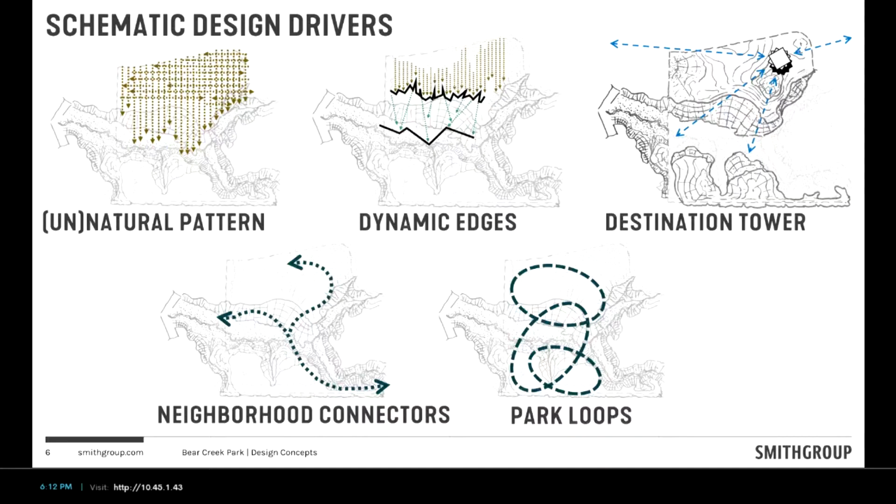One of the things in this phase that was in the master plan is the North Tower. You'll hear from Evo that we've evolved the thinking on the tower. We were actually out there again this afternoon looking across the creek up at the oaks, and we're really happy it's not a 100-foot-tall tower hovering above the park—it's knitting in there nicely.

The reason this principle is called the Destination Tower—actually it was Evo who brought this up—is that we'd both been to one of our models, Peninsula State Park in Door County, Wisconsin, which is visited by 2 to 3 million people a year. With that tower, whether you like it or not, you're going to visit it as a tourist. We didn't want that here—we don't know that Bear Creek Park will have that many visitors, at least not in the first year. We wanted to make sure it wasn't a one-and-done, where you just go to the tower and visit. So the question became what else it could provide—two or three other uses, reasons to come back—making sure it was not just an object, but a destination.

The other thing was connections—loop trails, making sure we build on the good start from some of the existing trails. What do we do to add to those? And knowing we're not going to be building all of the roads and parking, the trail connections from the south, north, east, and west—that neighborhood connection system—was a super important driver.

As we started putting pen to paper and taking the master plan further, we began thinking about patterns that could drive things like trails, structures, and the layout of some of these spaces. Not surprisingly, we looked to nature.

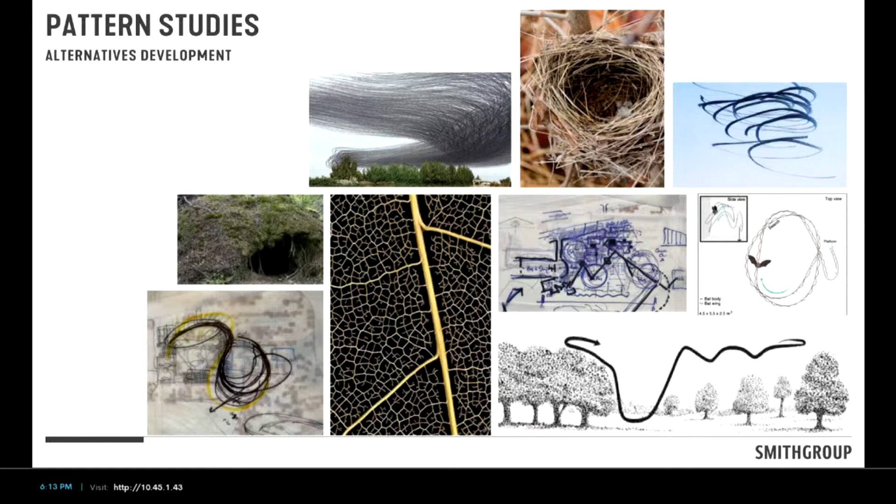We looked at wind and water, and we really started to hone in on a couple of themes - nests, broadly put, whether that's a bird's nest or a wasp nest, but things that were naturally formed, and that dendritic pattern of nests became an interesting driver. The other one was really thinking about migration and migratory patterns.

Some of this was interesting creative tension in our team, since everything is gridded on this park. So what's going to be the driver for something curvy and swervy? Is there something more than just wanting to draw curves out there? This idea of migratory patterns, bats and birds and things like that, where things weren't just viewed from above, but also went up and down, was also important.

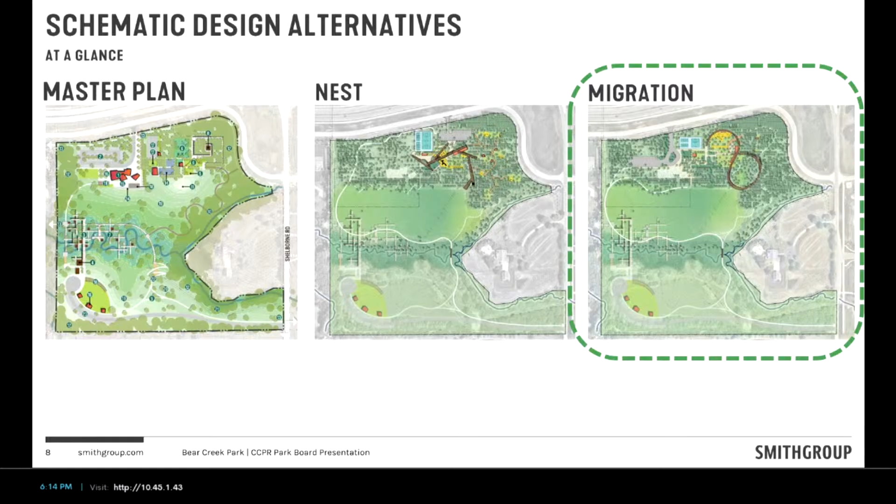So that got us to the midpoint, I think that was the workshop in April, where we actually took the master plan and advanced two different concepts for input from Michael and his team. One was called the Nest and one was called Migration, go figure. They both did the same things, with the basic program of shelters, play, courts and parking. We tried to make sure the program was apples to apples, but talked differently about it, and the tower was probably the thing most emphasized in that pattern, and probably the most different between the two schemes. There were a lot of benefits from both, but we kind of unanimously ended up on migration as the way to go forward.

So this is the master plan we were tracking down in the car here a little bit ago. This is the overall master plan of Bear Creek Park at a schematic point. It should look fairly familiar if you know the master plan, but there's a lot of subtleties here.

The master plan talked about oak rooms. Well, we've been confirming where those oak rooms are, how big are they, where are they. We've been moving the pieces around to find the right fit, where shelters go, next to courts, things like that, and where play should go.

Knowing that this is a really important first playground, but we also know that in 3 to 5 years, 5 to 7 years, with funding, there's going to be a really cool feature, affectionately referred to as chutes and ladders, south of the creek. So this wants to be that first really cool thing, but there's going to be something maybe bigger on the line somewhere too. So we're trying to find the right balance here, not just from a budget standpoint, but also from the experiential standpoint.

Big picture, there's a lot more development and activities up to the north, which was always the intent. It's a little louder up there, sort of the front door off of Voyageur. It will be more passive and quieter to the south, and in this plan, there's a bit of that as well, where we're really south of the creek. Once we restore the creek, it's really going to be about some of those mown trails, and then this multi-use trail that will connect from Shelborne.

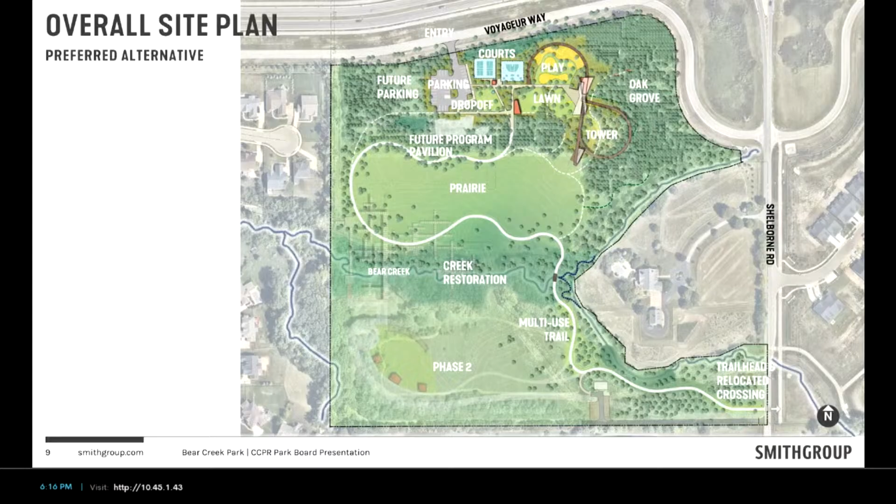Speaking of trails, this is kind of a high-level view of what that circulation system looks like. You see the major trail that connects through, and it'll connect into the other trail system that's being planned and built, depending on where you're at along Shelborne. So that becomes the main entrance from the south. And from the north, we're going to build the first phase of the parking lot, roughly in the same spot as the master plan.

30 cars now, and down the line there might be another 50 or 60 cars once the community program pavilion comes on board. And then the rest is really a series of dash lines, or mown trails, some of which are in place today, maybe a few more to come.

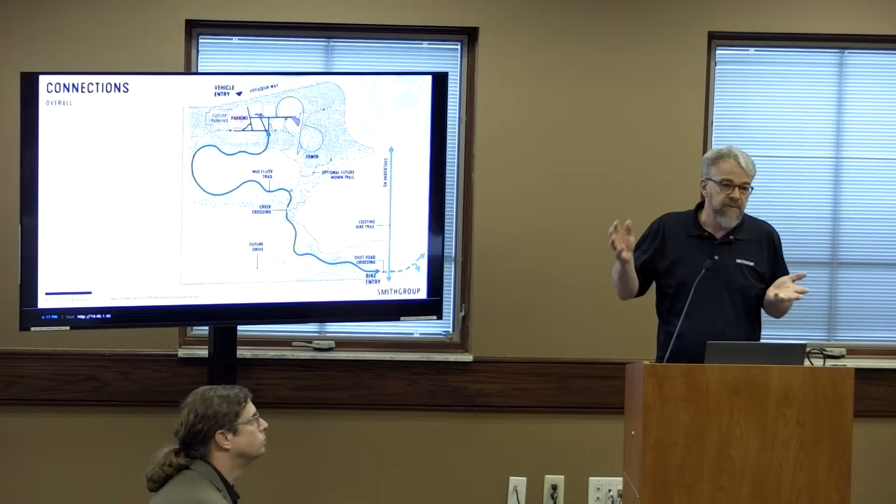I think our thought on those is that over time, if you want to put one through the prairie for a few years, you do that. You want to move it, you move it over here. I think that's a really great tool, and it's been working so great since we started the master plan, so these are, I would say, suggestive right now.

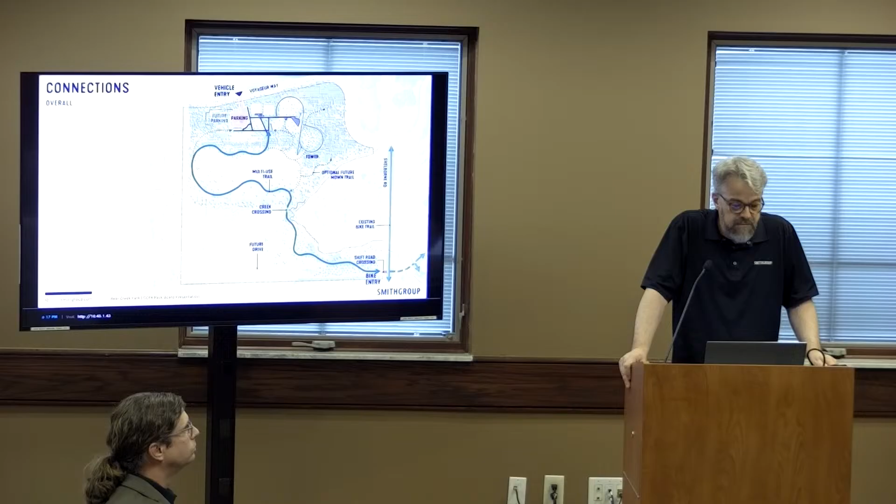And the rest are really sort of local connectors, sidewalks, things like that connect you to the play, the shelters, things like that.

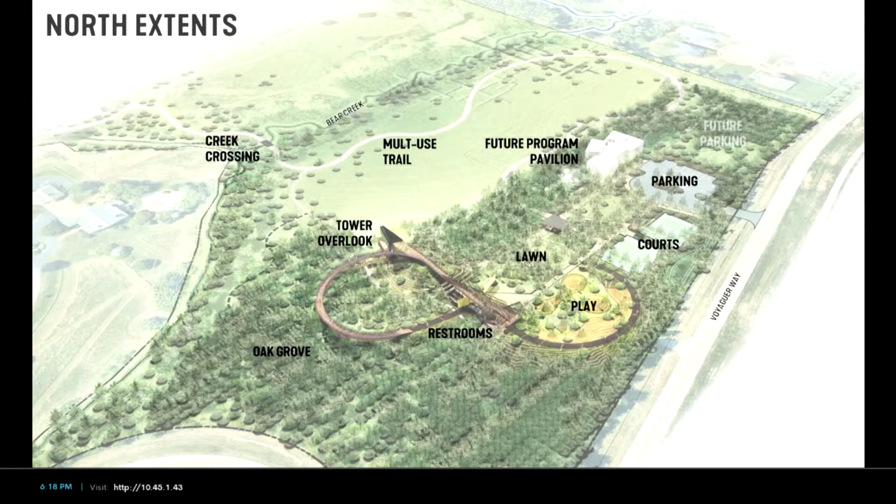But before we get into all of that, I wanted Jay to kind of talk about how this really starts at an ecological level. So, Jay.

Well, thanks for having us back. It's exciting to be back here and to continue to talk about Bear Creek. It's been a really exciting project.

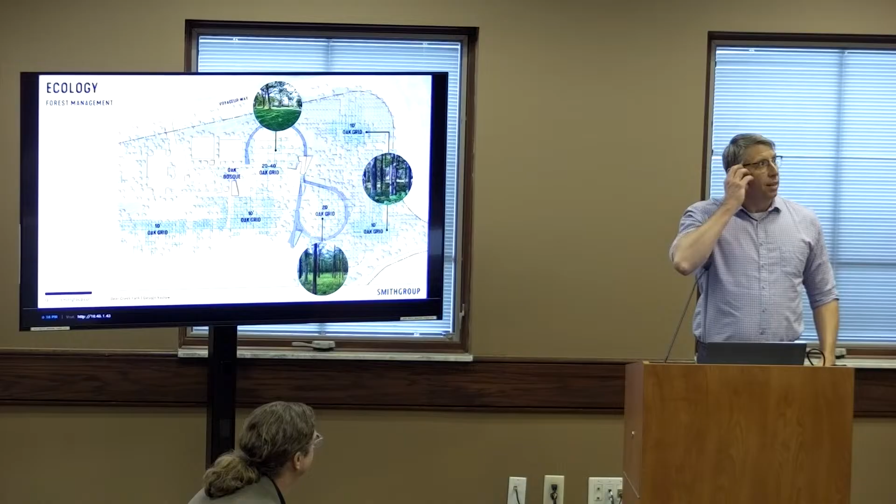So as Greg alluded to, we have this interesting condition at the site where we've got this grid of trees that somebody planted 15, 18, 20 years ago. They're about 10 feet on center, some of them about 8 feet on center. I think they were planted off the back of a tractor.

And the grid of oaks plus the other restored prairie areas and Bear Creek and its natural habitats became a big driver force for the project itself. I mean, it was part of the reason we talked about slowing this project down, was to take advantage of the natural assets on site.

We have the benefit of not having a greenfield. This is a great, wonderful space. And one of the reasons we said, let's slow down, let's put mown trails out there, let's get what we called the barn open, and let the community start to use this space and experience this space.

And if folks recall when we had some of those very early public meetings at the master plan, there were folks in there talking about going out there and seeing owls and different other types of primarily aviary wildlife. And so we wanted to make sure we're preserving that to the greatest extent possible, but maximizing that asset.

So the prairie areas are staying, the restored prairie areas are staying, they might even grow a little bit. And then we've been trying to figure out how to wrestle with this oak grid. We don't want it to go away. We want to be really thoughtful about how we maximize the benefit of that asset.

There's oaks on the grid, but there's also some oaks that have died, and there's some volunteer species that we probably don't really want out there. There's some invasive pear that we don't really want that probably need to come out anyway.

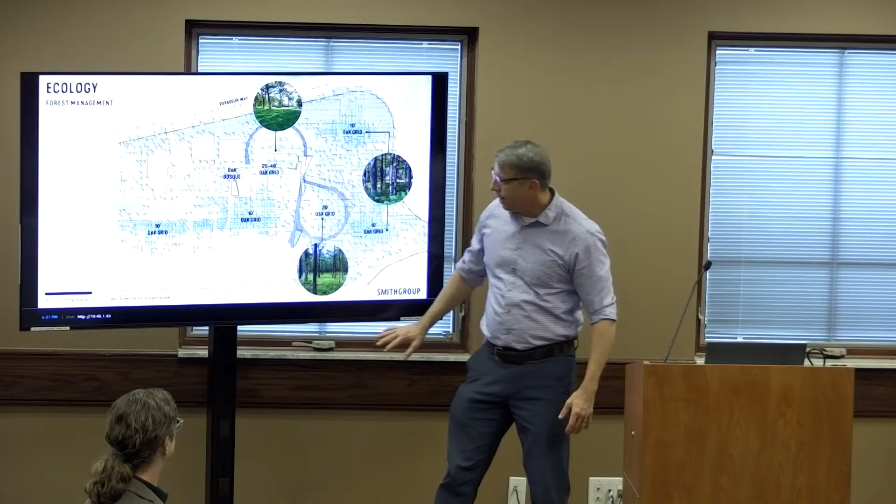There's a lot more walnut and ash, especially along Bear Creek, and as we get south to where the old residence used to be, there's not very many oaks at all. There's some hackberry, so some of it's good native, some of it's not. But we can move some of those oaks from the north end that would be otherwise impacted by our project to the south end. So there's a moving operation to be able to relocate some of those trees on site.

There's a moving operation to relocate some of those trees potentially to other parks. If we know we're gonna have to move the trees anyway for some of the development, we're already starting to think about, is there a need for a good 15 to 20 foot tall, 6-inch diameter oak at West Park? So trying to think now about where some of these trees might go to other facilities where we can benefit the portfolio of parks already.

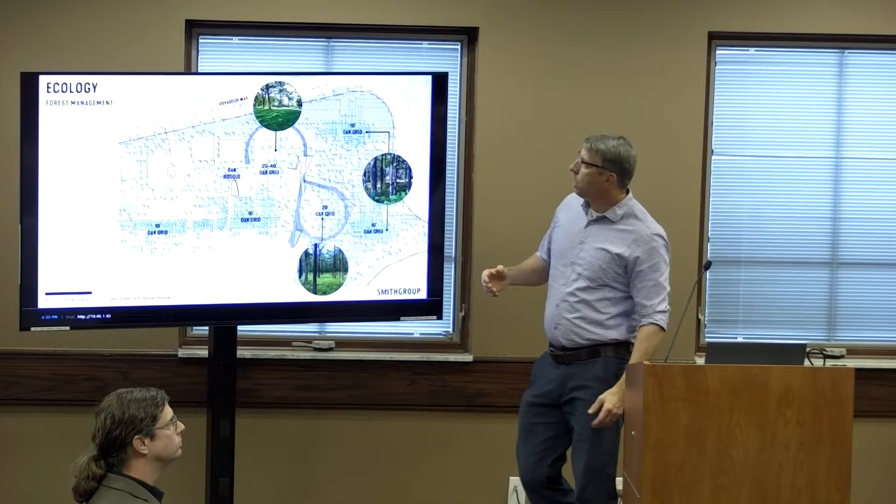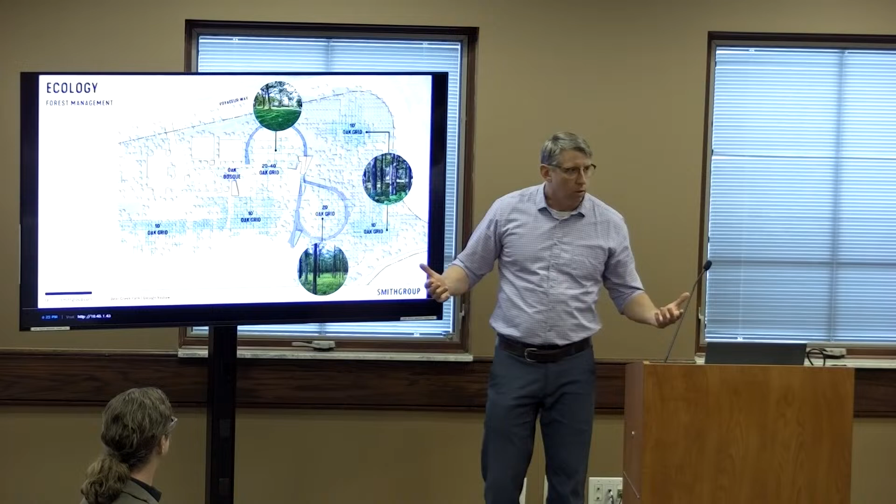After talking with the spader, we realized that some of these trees can actually be moved and temporarily stored on site, and we can move them right back to their old location if done right. If we're working with the right spade operator, they can come in, spade the trees, move them to a temporary location, a nursery facility probably on the south side of the park, and we can keep those trees with the drip irrigation system healthy and alive, and then move them back, as long as we're not talking about 8 years down the line.

If it's in about a 2-year range, we can move them and move them back and be really able to reestablish those trees in a responsible way. And that allows us to maximize the benefit of having 18 to 20 foot trees, and hundreds of 18 to 20 foot trees on this site.

So the next step we did was to take a look at, what do oaks really want to grow at? What's the spacing that oaks really want to grow at? A 10 foot on center spacing is really too tight for oaks. Occasionally you'll see oaks growing that way in nature, but it's pretty unusual that you'll see oaks in a 6 to 8 foot spacing. So over the course of the last couple months, while we've been out and about doing other things, we've been trying to evaluate how oaks are naturally growing.

Generally what we're finding is they prefer about a 45 to 65 foot spacing. So what we've tried to do is look at, in our highest use zones, prioritizing those spaces to move our oaks out, relocate them elsewhere on site, relocate them on this site, on other sites, or move them and then move them back, but trying to achieve closer to somewhere between a 45 and a 65 foot spacing.

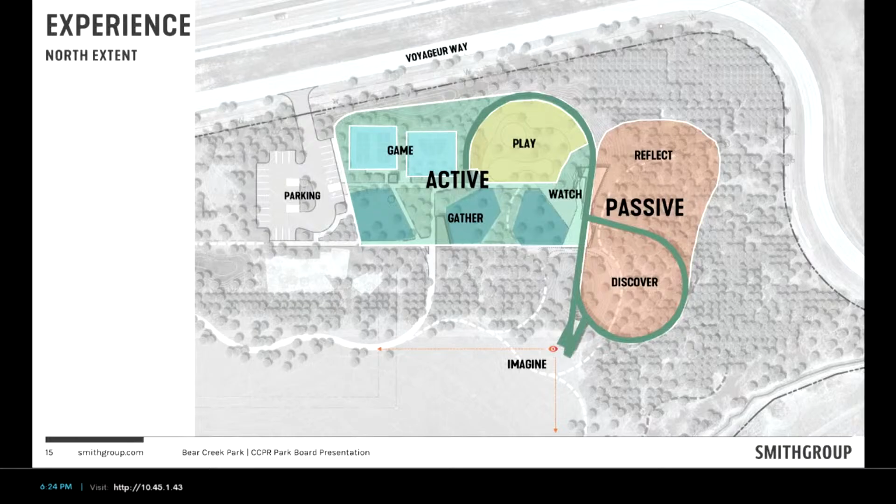The way we dealt with the oaks was to really think about the site, the north site, in two ways. There's a passive arm here and an active arm. So that migration architecture that we developed really allowed us to split the site into two different zones. And you'll see when Evo presents it, the structure itself actually creates a bit of a curtain to allow you to have a very active zone, kids and families picnicking and playing and running around and doing their funnest activities.

And then a moment where you make a bend, and all of a sudden you're back into the densest part of the forest, the quietest part of the forest, maximizing the benefit of keeping those oaks tight. This happens to be where our oaks are going to stay the tightest, and you're back into a passive space, a reflective space, a discovery space, where we're really bringing your focus back into nature.

And as Greg alluded to, it's not just that it's doing this motion at a two-dimensional scale, it's doing this motion and coming up and coming back down. So we're really trying, and Evo's gonna present that in a moment, but we're really trying to maximize the benefit of that structure serving as a mechanism to really marry the two experiences of the site together.

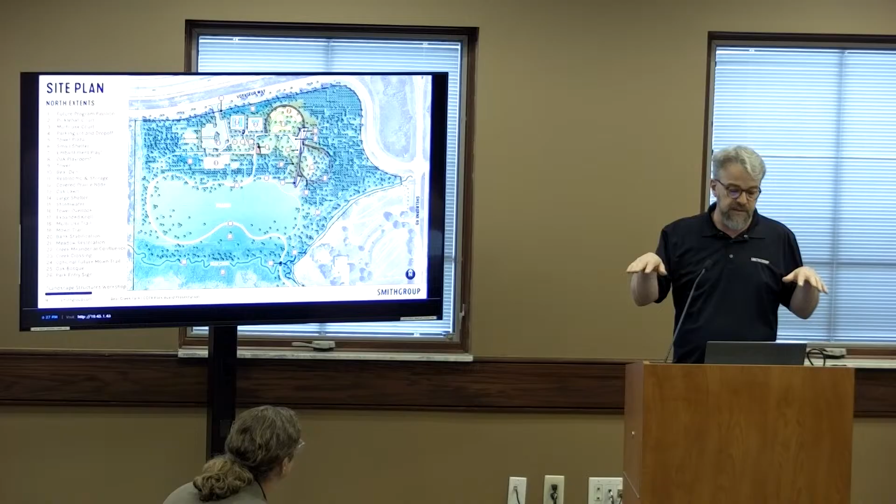We want to make sure you can get there accessibly. So you could just do a ramp system, which is kind of a boring thing, or we can make it into a journey or a migration. That's kind of what the central feature of that really is.

And the way we start to do that is, going back to what Jay talked about with the trees, we're looking for where some of the openings and maybe where the invasives are that we know of, and we're trying to target those as places to do more of the grading, balancing cost and impact, good and bad.

So a lot of this is really on berms. If you think about what we did at West Park at the playground, where you climb up on that berm, it's the same general idea here, a different playground, but the idea of actually climbing on a berm, minimizing how much of this is really just on structure.

But then where we have structures, we're going to use them for multiple things, and the same thing coming down. We also have similar low areas that we're getting ahead of where stormwater is going to go, things like that. So this first phase is starting to really drive that.

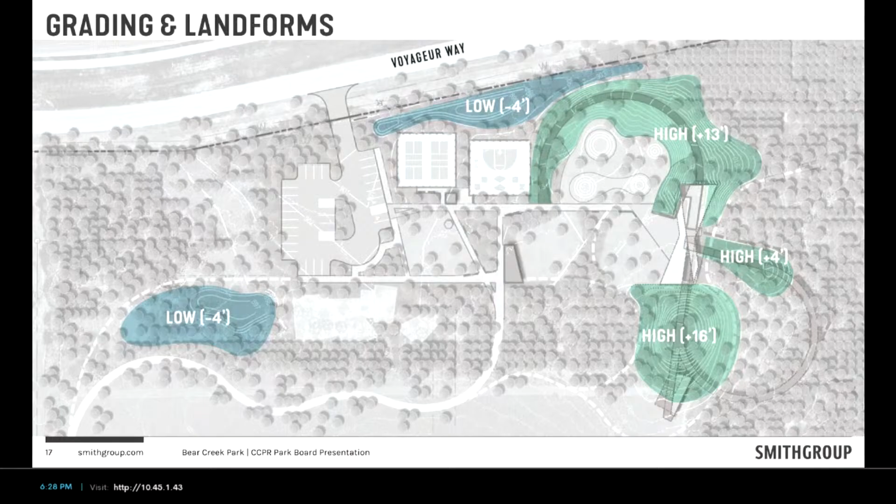We call it berm hopping, where you have this play berm that you climb up, and then for a bit you bridge across it, and we're actually taking a knoll that's already on the site and adding 8 to 10 feet to it. So you kind of hop across to that, which becomes your launch point for what we're calling the tower experience.

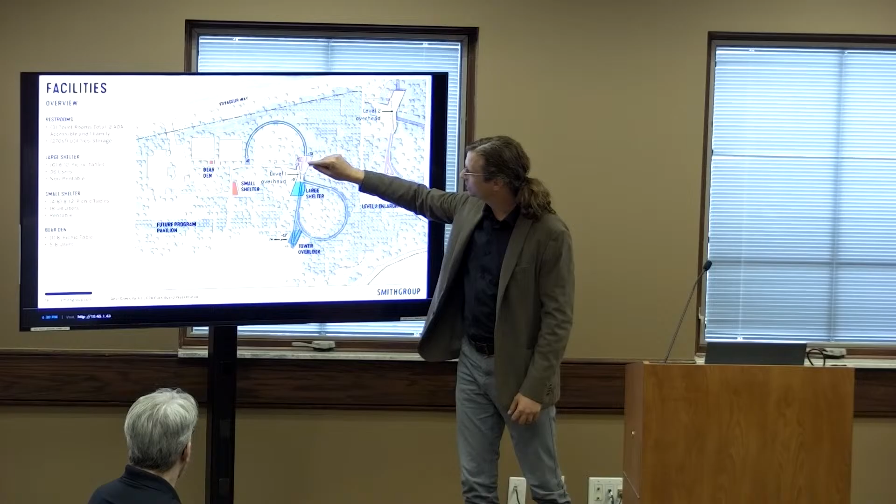Ramp up to what we call the parent perch. These rooms start to move upward into the canopy, 13 feet here, and continue along the spine. It straightens out for a moment, potentially to align your experience as you come to this opening that's naturally there now.

Sorry, can you get close to the microphone? Swing it around. Could we get them a handheld mic? I will maybe work on my point. Thank you. That's fair, good point, I'll grab the right device here.

So the point at the end is 14 feet above grade. This is actually something we studied quite a bit when we first thought about a tower experience. We thought, what's right? Is it 20, 30, 40, 60, 100?

We studied what's the right experience in Bear Creek, and we really came to the realization that once you get too high, you're not experiencing the park. Knowing that as these oaks mature through this ecological wisdom of spreading them out and letting them become the beauty they once will be, right now we're creating today's experience, which is in the canopy, but as the oaks mature, you'll be midway through that canopy. It'll be a really amazing experience to watch this park mature over time.

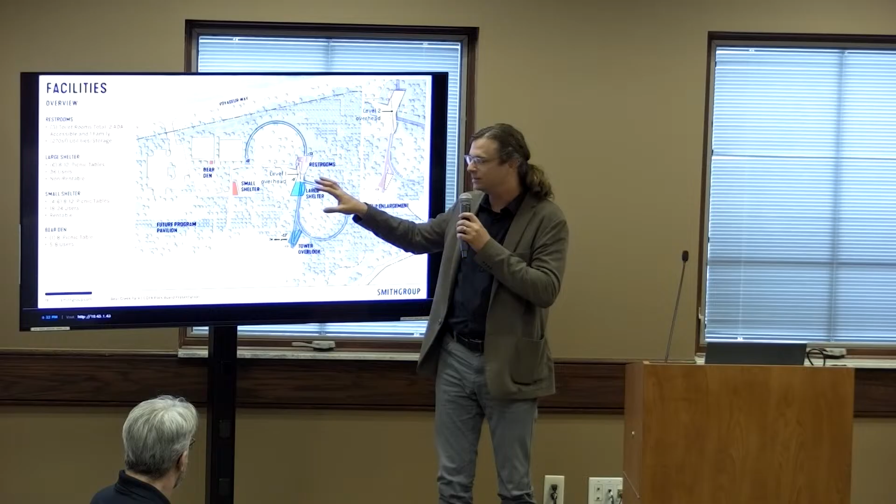You'll come up to this 22-foot overlook, and as we transition you'll see some moments of architectural expression, but really leaning into this idea that everyone probably has their own reference, but when you walk through a gridded experience, think of a cornfield or this sort of farmed tree scenario.

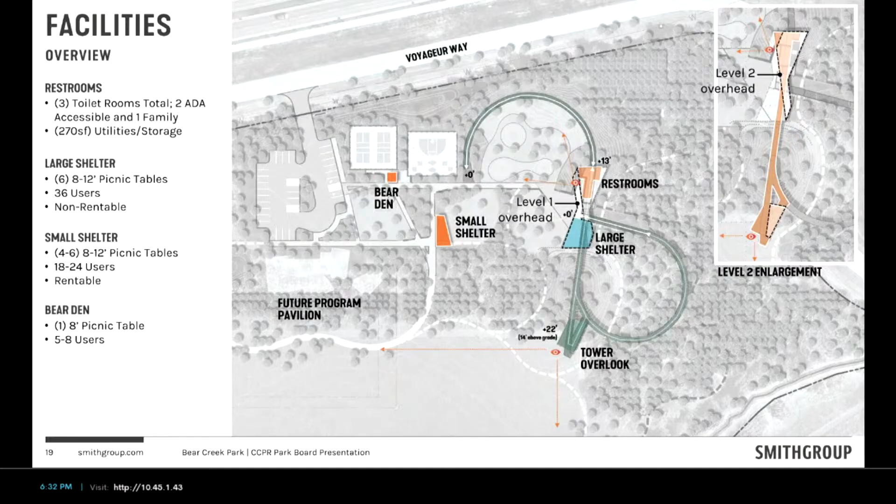Every angle you look at creates these glimpses and curiosities. The curved walk through really leans into that forced experience through seeing these linear trees in different perspectives until you get to this forced perspective, which is really wonderful over the field.

And then back down the ramp to the core. This core is where restrooms are embedded at the base, and then one of your main rentable shelters is sheltered here as well. What am I forgetting here?

I suppose this is the upper section. As you can see, when we get to the architectural expression, these moves are interpreted to help play with that canopy and filtered light, providing shade but also shelter from any rain.

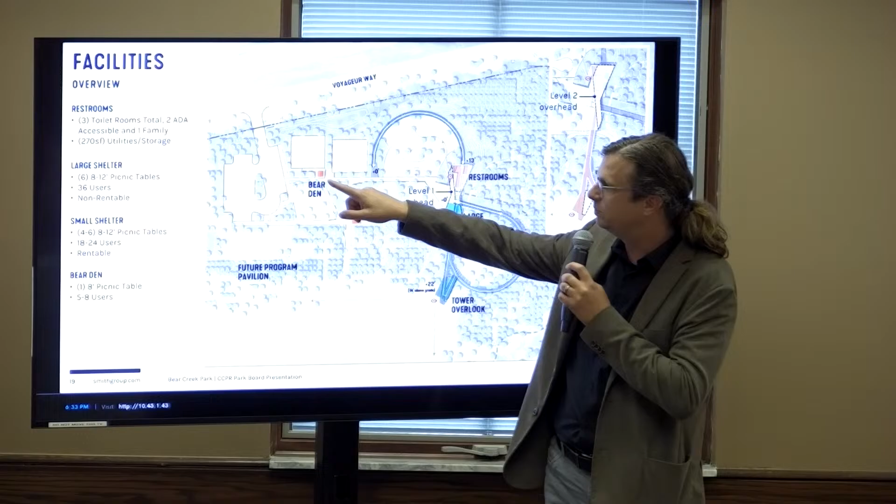So the rest of the program, to be clear: 3 restrooms, 2 of them accessible, at the base. Utility and storage minimally there as well. The shelter that Greg spoke to, which we're calling this bear den, a small single picnic table for 5 to 8 users adjacent to the courts there.

I'll jump to the next slide. So here you get your first view of the floor plan of the core structure. I joke a little bit here - people see different things, but today, after seeing a praying mantis on site, I want to pretend that this is inspired by a praying mantis. I see some similarities.

So anyway, joking aside, the first floor plan: storage room and the 3 restrooms. Then the structure floats above, as you see here, to create a sheltered, larger shelter here.

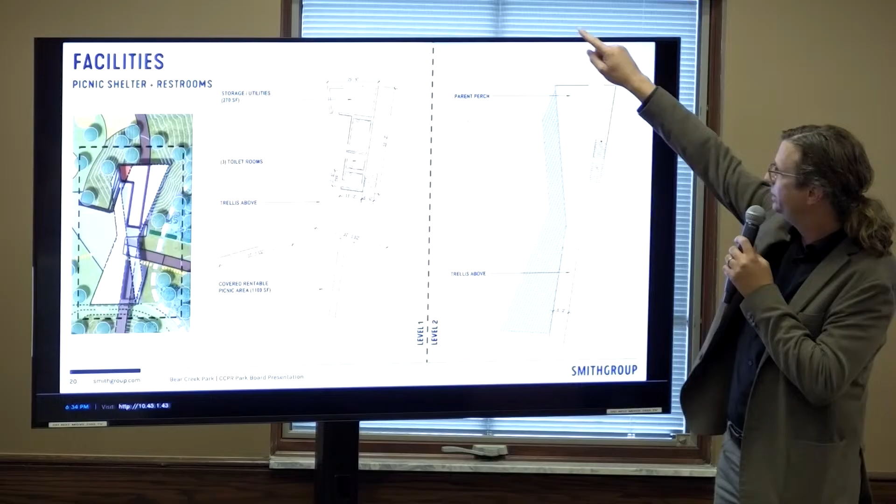And then the upper section, you'll see the upper plan here. The ramp comes up to an upper occupiable area, a moment to overlook your kids playing. If needed, you can short circuit the trail back down to restrooms, really creating this hub at the center of energy and circulation for this part of the site.

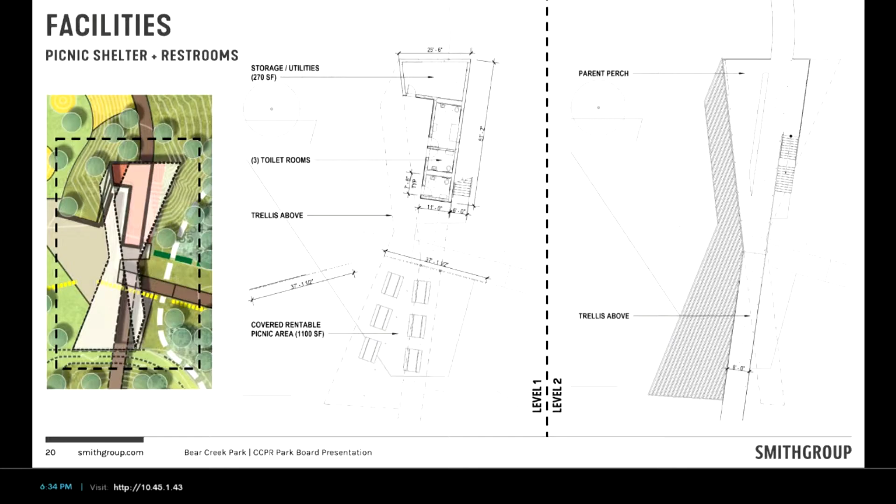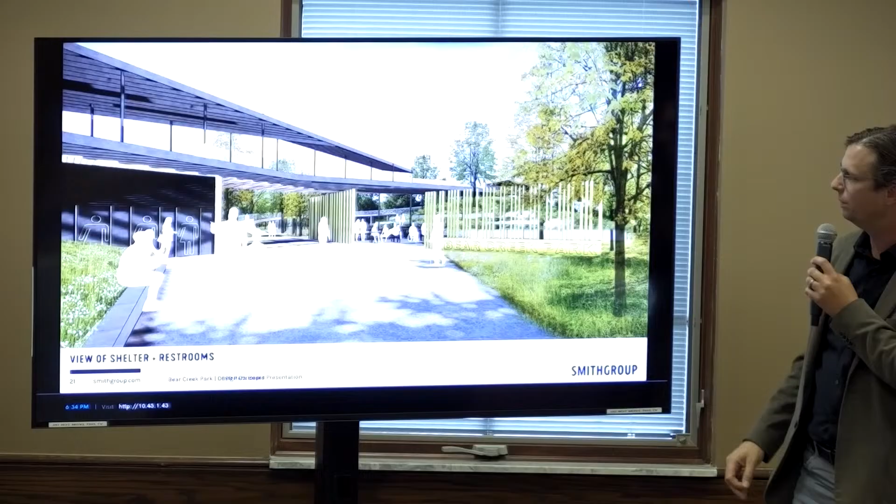Here's your first peek at what that experience is. Arriving from the west towards the structure, you can see some screening, some playing off of this repetition and visual play that you get naturally in the landscape with a graphic element there.

There's your larger shelter, restrooms on the left side of the image, and this is one of your portals up, starting the journey back up, and you can take either direction. And then this is that raised perch moment above.

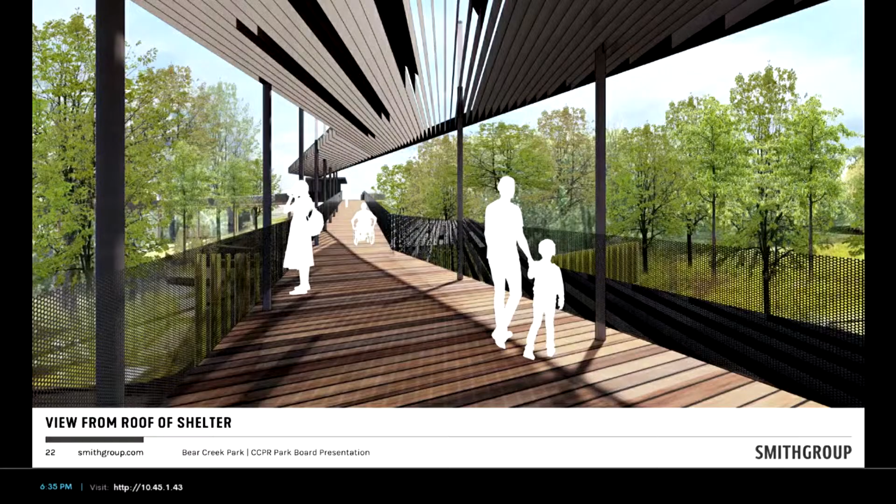So now you're about 13 feet up. This is pretty indicative of the tree canopy today, so you're in the canopy. The play area is to the right of the image, and the more quiet, natural areas to the left side.

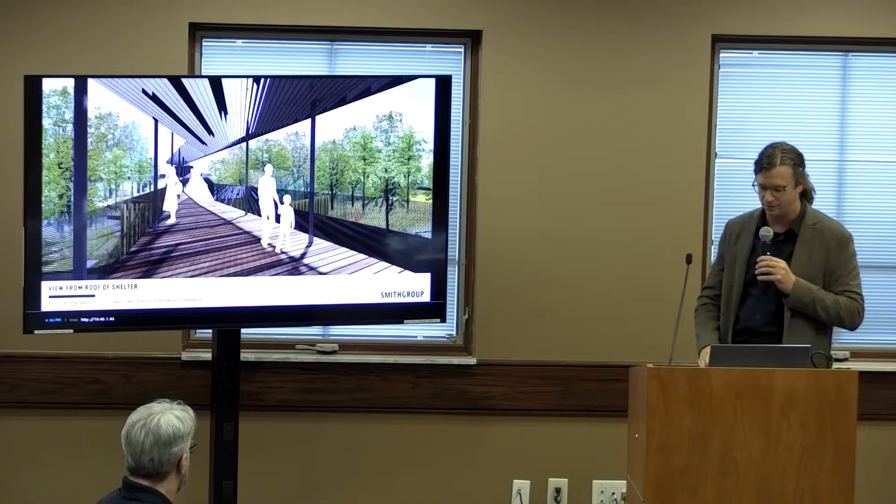You can see prairie is straight ahead, and I think the design of this is intentionally, as I mentioned, curved to sort of contrast with this grid in the landscape, but also has moments of intentional linear elements to really force your perspective and drive you down towards the end.

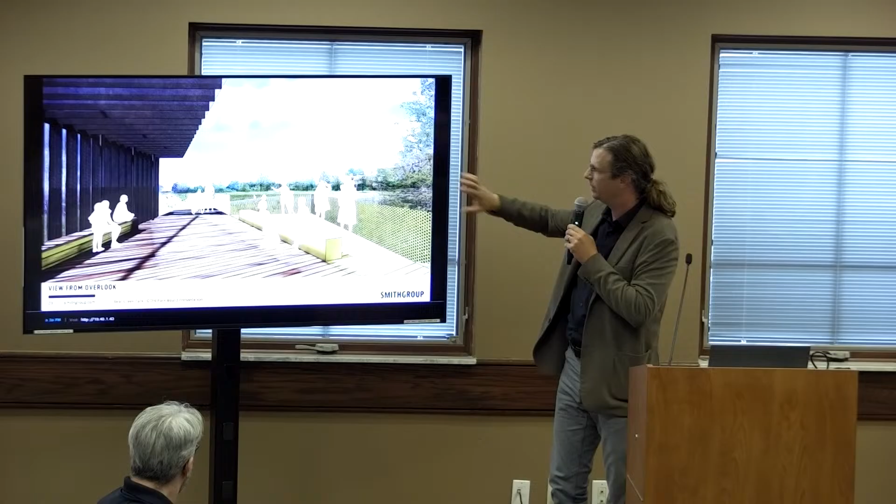And here's your perch moment. So again, using a series of linear vertical moments to frame the left view to force your eye to really enjoy the perspective shot over the prairie and over the creek.

There's the future chutes and ladders for context. This is a space that can host 12 to 25 people, kids or adults. It can really scale and be a moment for teaching or gathering. It's quite flexible, but still feels intimate when more sparsely occupied.

We'll integrate a few bench moments, as you see. I think the other nice thing this does is the residence to the left here - I don't know if we have a name for them yet - are nicely obscured. It would be visible without this screening. So it not only screens that home, but also really focuses the purpose of this space back towards the inside prairie.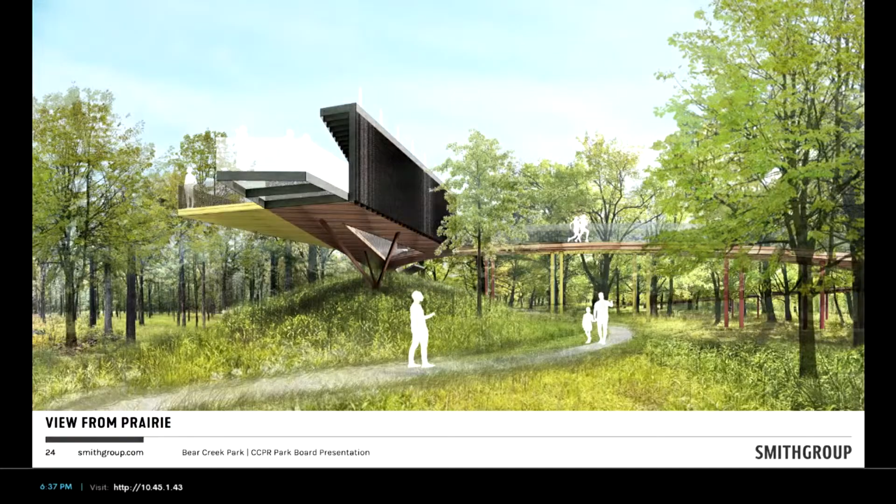And then this is your view of the perch coming from the South Prairie Trail on the east side. You can see that perch. Maybe we have different moments of experiences - some transparency, some netting experiences, little moments to offer some transparency and porosity. And you can see the trail coming back through.

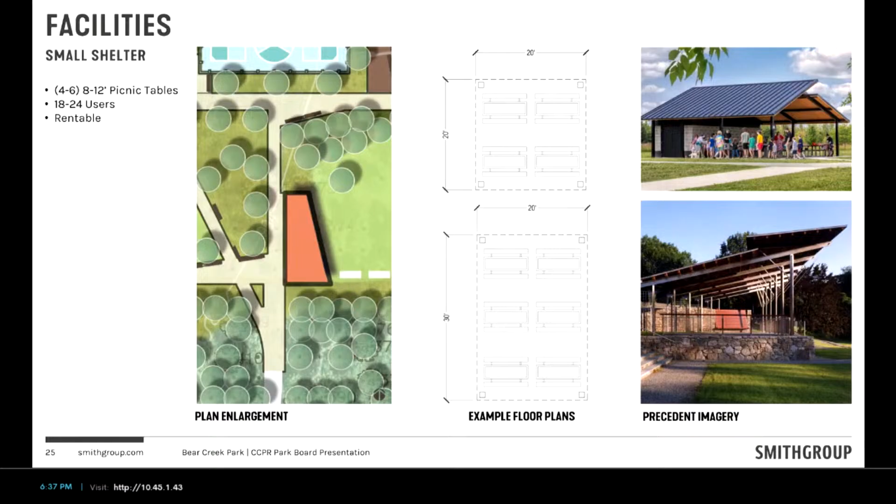All right, and just as exciting are the remaining shelters on the site. So a couple precedents you're familiar with, this one here for sure. I think this is maybe a bit more standard issue, but we think the architecture will be a simple relating expression to host 4 or 6 picnic tables below, 18 to 24 users.

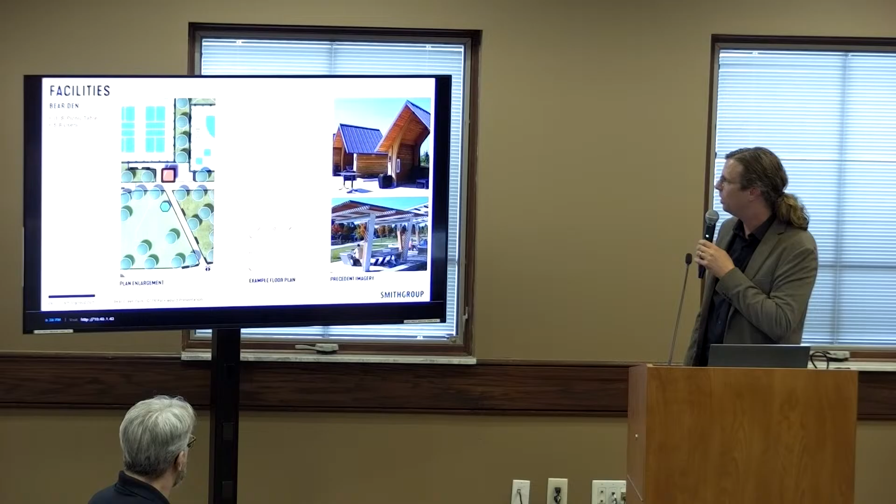This is a rentable shelter closer to the open central court, with pretty great proximity to both restrooms and the courts. And then this is what we're calling affectionately the bear den, so much smaller - more for a single family or a small pod of people, 5 to 8 people. These are a module that could expand into the future if needed throughout the park.

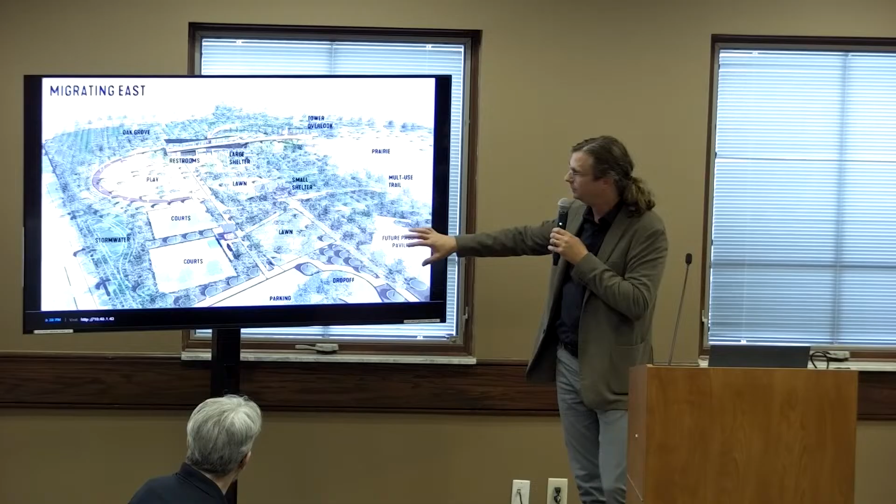So another shot from the west looking east, you've got the future program pavilion. Here you've got your parking lot and arrival lawn. We just talked about the bear den, the courts, that initial small rentable shelter. And you can see here, this is where the central lawn occurs, and you have your ramp that starts to wrap play and creates your first perch to the praying mantis inspired canopy experience.

No, I shouldn't play that too strongly - over to the overlook, and then you're looped back down. So really excited about the energy and momentum that this migration model will send through the park. As a parent, I love the idea of my kids being able to circle through the space, and I can be in one moment and know they'll always kind of return back, ideally.

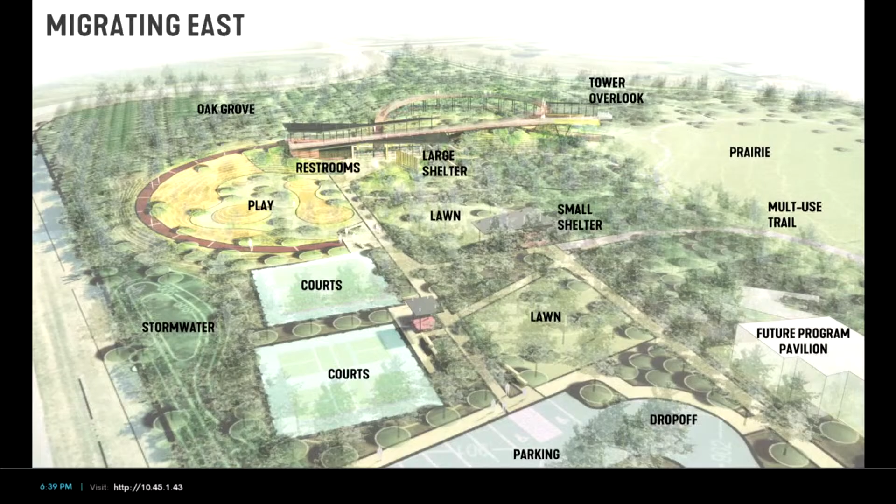Well, I just love how this has evolved into a guitar, and now into a praying mantis from one site visit today. So you kind of see the proof of things.

I think this is a good overview that gives you a sense of things. Another thing we're starting to think about as we move forward is kids racing and all that, but we're also thinking about distances. As we dial this in further, does 10 laps give you a mile, or things like that? Does it become a fitness piece, a parent piece, more than just a one-off experience that you come back for?

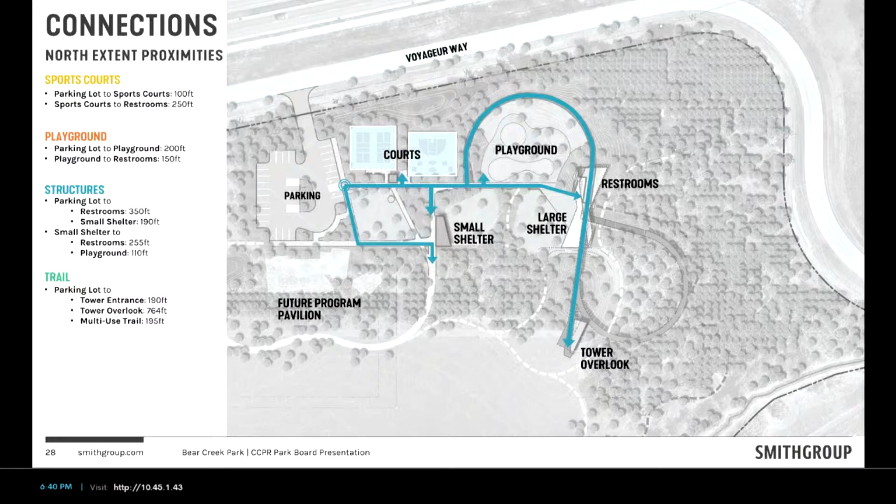Based on a lot of discussions with Michael's team, we've also been thinking about proximities—distances to toilets from parking, shelters to toilets, things like that. At this point, everything is meeting a lot of the standards we're seeing in other parks we've worked on. A great tight little core here, but also enough space so it's not too tight. As a parent, as a range of users, it's got a good all-day experience, which is one of the goals in the master plan.

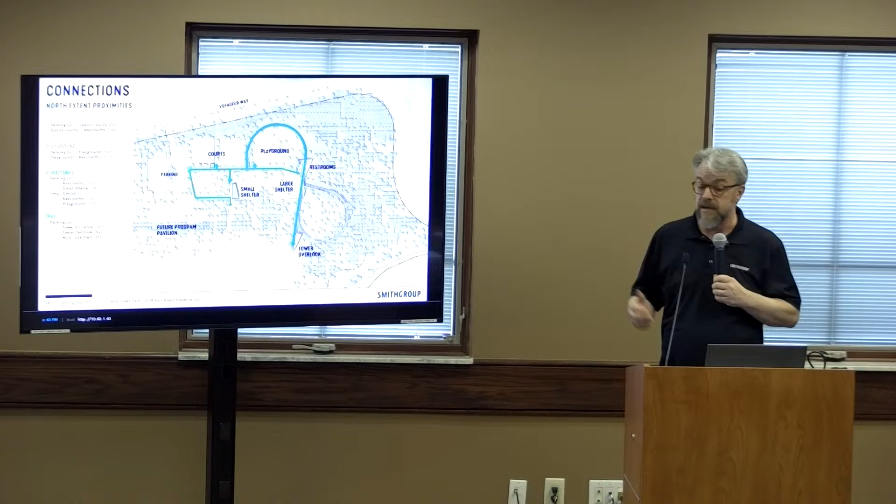So hopping south, and we're coming into the home stretch here. There's a lot going on in the north, but quietly, again, what Jay described ecologically, it's really a do-less-harm kind of experience here.

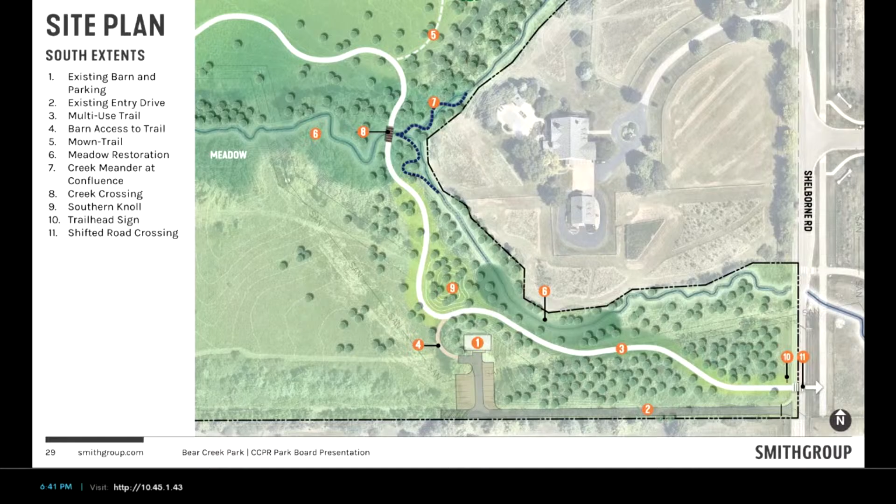Our focus has really been on this, and Jay will talk about the creek itself in a second, but this gives you a sense of what this trail experience will look like coming in from the south. We know down the line that this entrance drive will do something like this in a few years when that phase gets done. So we're intentionally pulling this trail off that line, knowing we'll leave this in place for a while. We fully anticipate that the gravel lot over here, that facility, whether for ad hoc programming or maintenance, is still a valuable resource. So from day one, we want to get this trail in the right place.

First, we're recommending we change the current crossing to have a line where you're able to cross Shelborne and get into that greenway system. Then we start following where some of the sanitary utility lines have gone in, using those openings for the trail corridor, and really hugging the creek corridor—getting down low and working your way down to the creek, with connections back up to what we call the barn. Eventually there'll be other programs over here too, but really you start to get a glimpse of the creek as you're coming into the park.

So there will be some restoration happening up here, really more vegetative management, more so than some of the things on the creek that we'll talk about.

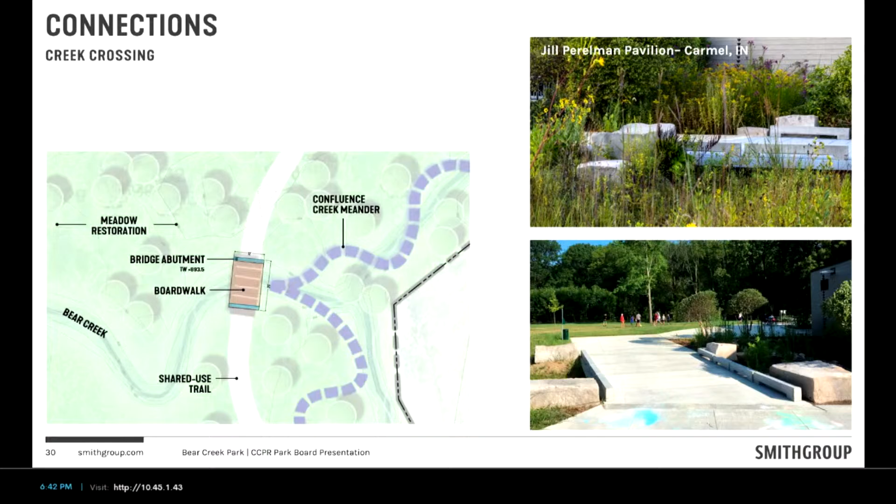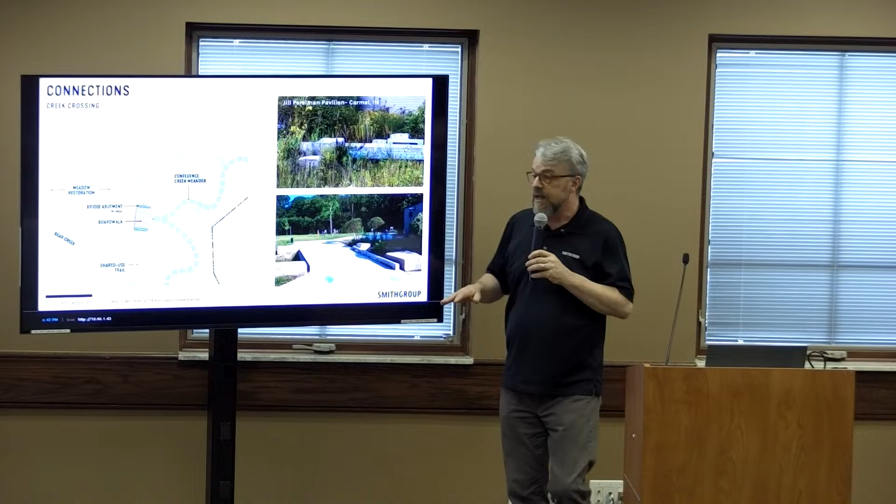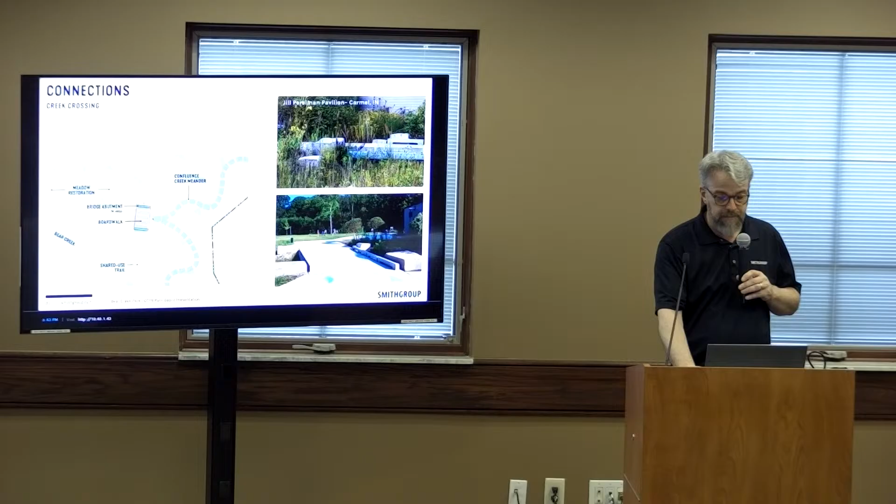And we'll have a little bridge crossing. After a lot of discussion, one of the future phases is going to be a pretty robust boardwalk system. So our thought here, instead of a soaring architectural experience, was to treat this as the first section of boardwalk, and down the line you'll add more. We looked at a couple options, and we really like a version of what we did up at West Park as a product—that precast concrete boardwalk, low enough it doesn't need a big handrail. It'll be a very casual, low creek-crossing boardwalk that we've got proven experience doing with you.

So you really feel like you've got a true north experience and a very different south experience, both equally dramatic. As a bike, as a pedestrian, this is going to be a really strong moment for coming into the park. But going back to the bigger picture, let's talk about what we're doing to the creek.

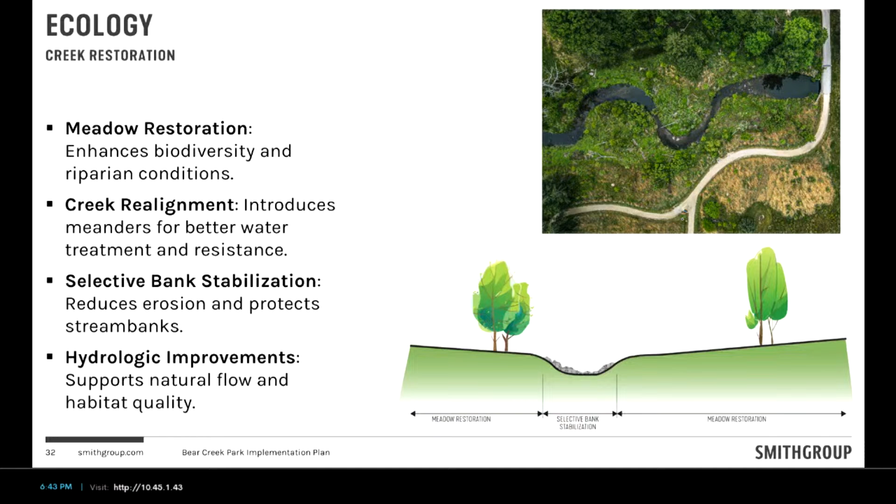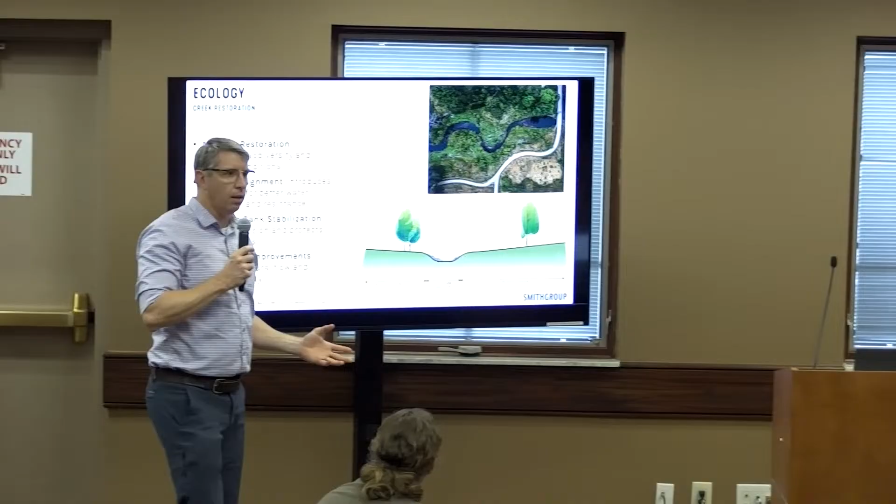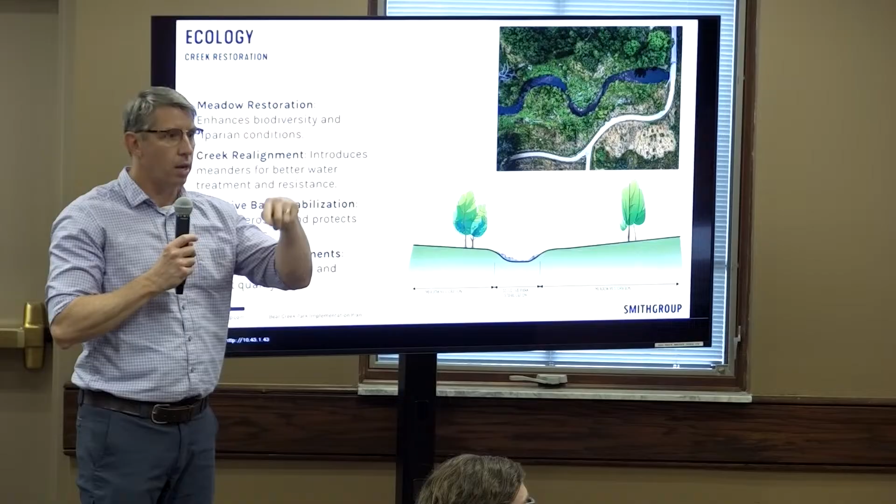Again, picking up on our theme of less is more, if folks recall at the master plan, we looked at some pretty broad sweeping stream restoration ideas, including remeandering Bear Creek, moving it way north and then pulling it back south. What we learned is there are probably a few places where we need to do some concentrated restoration. We may need to move the creek in a few places in a future phase, especially when we do the chutes and ladders and the boardwalks.

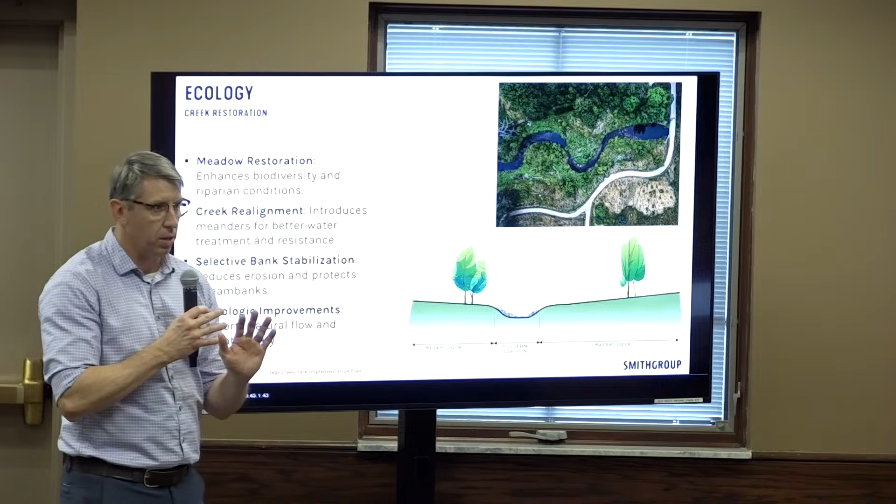There's a few spots where the creek approaches the toe of the bluff - we call it the Indiana Bluff, but it's not that tall, it's in the 15 or 18 foot range. It's not sandstone, but it will be an erosive issue for the toe of that bluff in time. So there are a few places as you go west where I think we're going to have to look at moving that creek a bit, just to take the hydraulic pressure off that toe of the bluff.

But in this part of the site, especially on the east side, it's really about being more thoughtful about making the creek more visible. Can you hear me okay?

Okay, good. So in this instance, we're more interested in thoughtfully marking some of those existing trees and then removing a lot of the understory and underbrush that's obscuring your visibility to the creek, being very thoughtful about vegetative management and restoring more of a meadow environment closer to that creek.

As Greg and Ivo alluded to, we were on site today. There are some really nice, elegant walnuts that we just need to tag and say, don't remove that tree. We don't want to do a clear cut along the creek. But then there are some walnuts that are snags - they're dead for all practical purposes.

There's some ash out there, some pear in there, a whole bunch of honeysuckle. There's a lot of clearing we can do to make the creek itself more visible to your community while preserving some of these really great, beautiful walnuts that will become the anchor for the chutes and ladders in a future phase, and allowing us to come in here with a vegetative management strategy that will open that creek up.

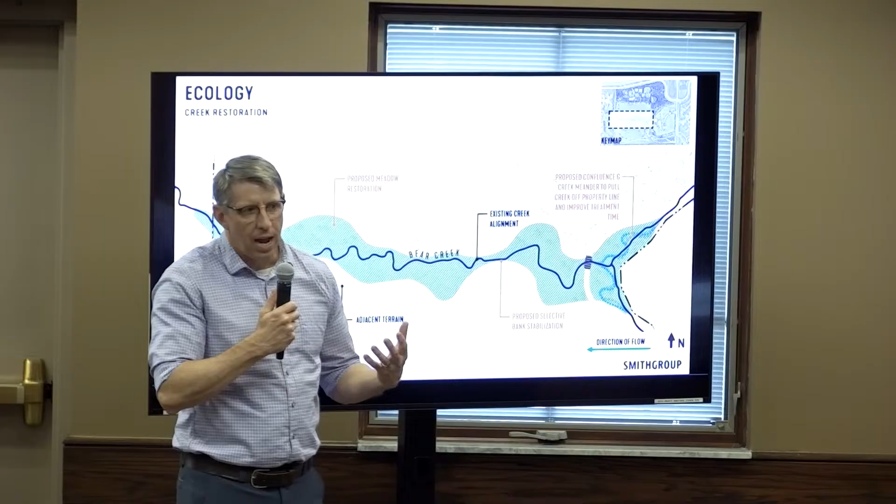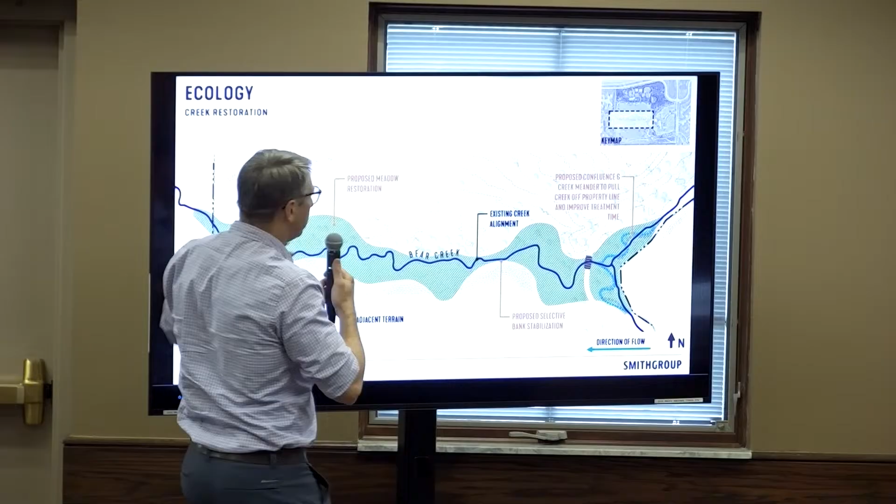We'll really extend the prairie-like experience down to the water, because if you're not an eco geek like me, it's sometimes hard to tell the difference between prairie plants and meadow plants, but they'll start to merge together. It becomes more grassy, more floristic, less tree dominant, less shrub dominant. And what happens ultimately is that from that tower point, you'll be able to get these great views down, extending all the way to the creek.

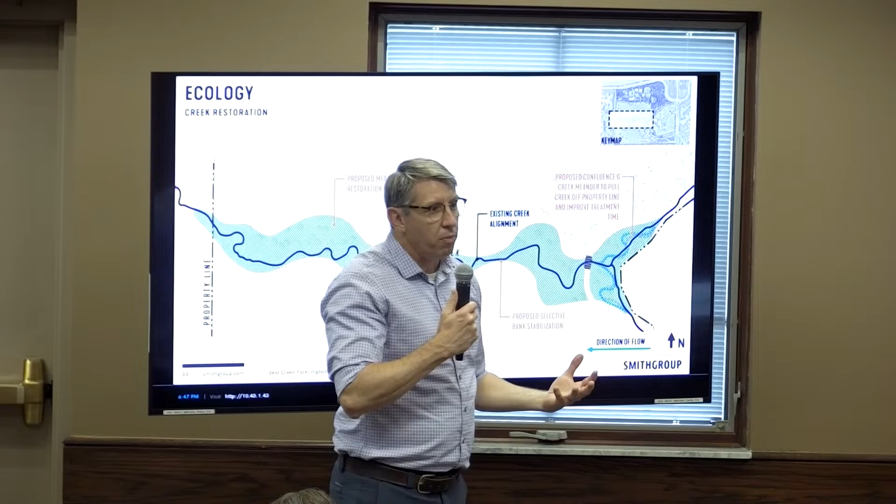This might be a spot where we start to think about relocating some of the bur oak or swamp white oak that are in that tree grid today, down here, where those species prefer to have their feet wet sometimes anyway. This lets us establish the right kinds of species from a forestry standpoint, so that when those walnuts die, maybe 20 years from now, you've already got a 40-year-old oak right there, and we haven't lost canopy. We're not starting over when we lose those walnuts.

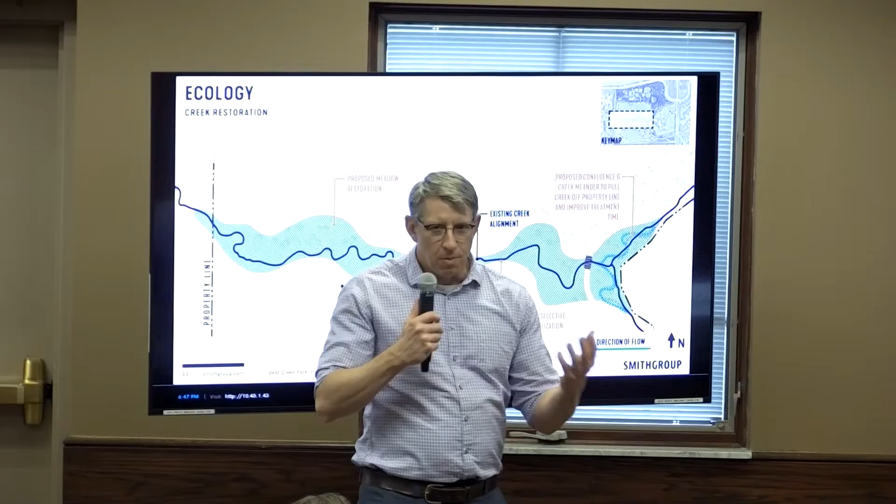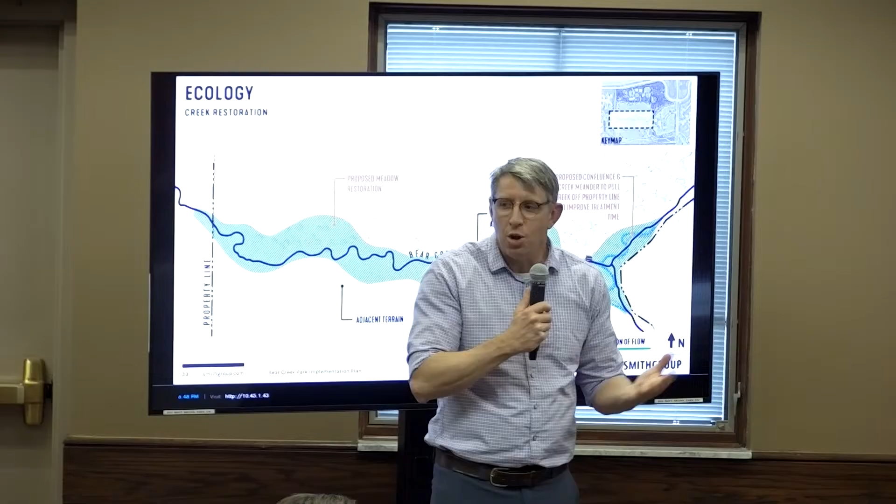So being really thoughtful about maximizing the assets, the natural features, the ecological features of the site, to really turn this park into something special. It's not a greenfield - that's a wonderful asset to us, and we're able to turn that into a really different way for your community, for CCPR, to do nature experience and nature play in a way you haven't been able to do before. This is the next phase of something new, and I'm really excited about where it goes.

Do you want to talk about donations? Yeah, I think this is actually our last slide too.

We're working on a roughly $8 million construction budget on this project, but I do know there's some interest from folks in the community about maybe donating too. So we've started thinking about what elements might be logical donor opportunities - highly visible, family oriented - whether it's naming rights, those are details to be figured out later.

The design is starting to generate a lot of those, but the lowest hanging fruit we've found so far is that whole perch area that Ivo talked about - that upper level, I think, makes a lot of sense. That lower level seating or shelter is something that would make sense as well.

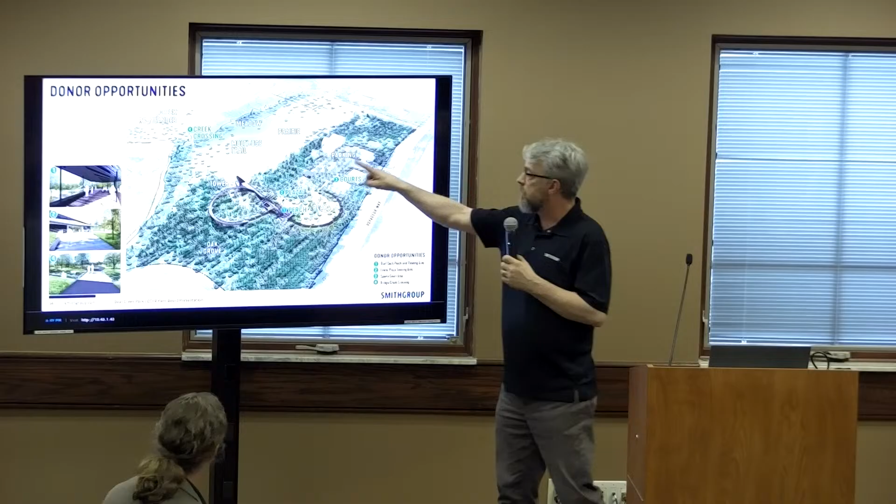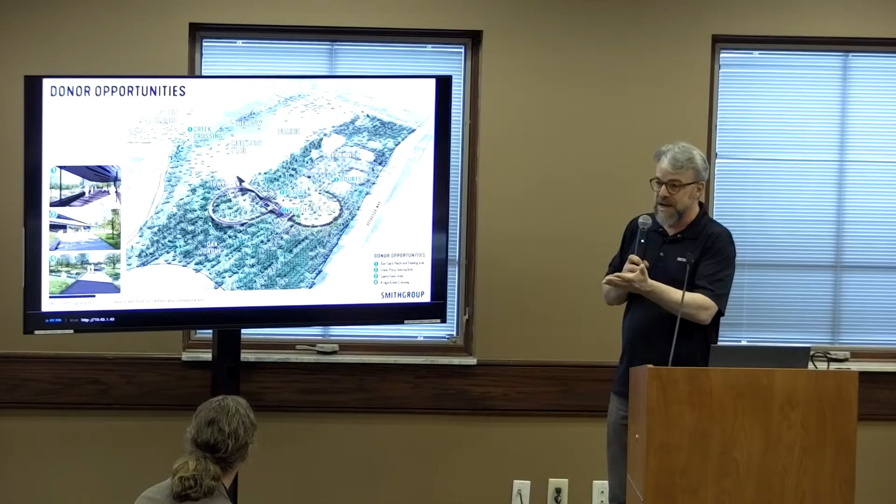The sports courts themselves could be a logical place someone might want to sponsor and pay for, we think. And then the bridge crossing - that experience, not just the crossing, but what Jay just described, that idea of looking down and that being a real ecological education station. I think that's going to be a magnet for a lot of activities and programs around that little bridge and crossing. So that could be another logical place for a donor.

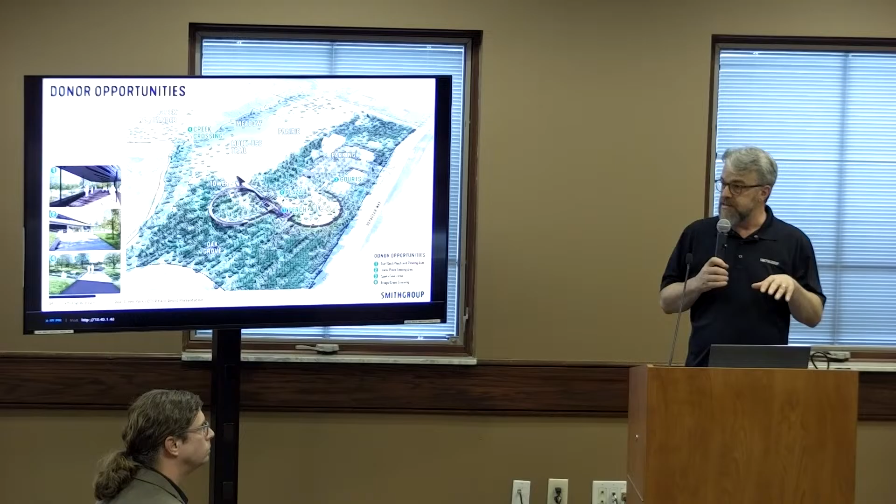And right now we're in range on the budget. I think we're still at schematic design. We're carrying a 25% contingency. I think we're right around, closer to 9 than we are to 8 at the moment, but with contingencies and some things we know about, we feel pretty good that we know what your budget is and we're going to hit it. So ultimately that's the vision of where we're at with schematic design right now.

And I don't know if we are taking questions or if you have thoughts. We have nowhere to go, but I know you've got other business too. Can board members ask some questions now? Oh, absolutely. Okay, so now would be a good time - we're going to take a break in a little bit so Greg and his buddies can depart and not be stuck with us the rest of the evening, but let's go ahead and ask some questions now. So who would like to start?

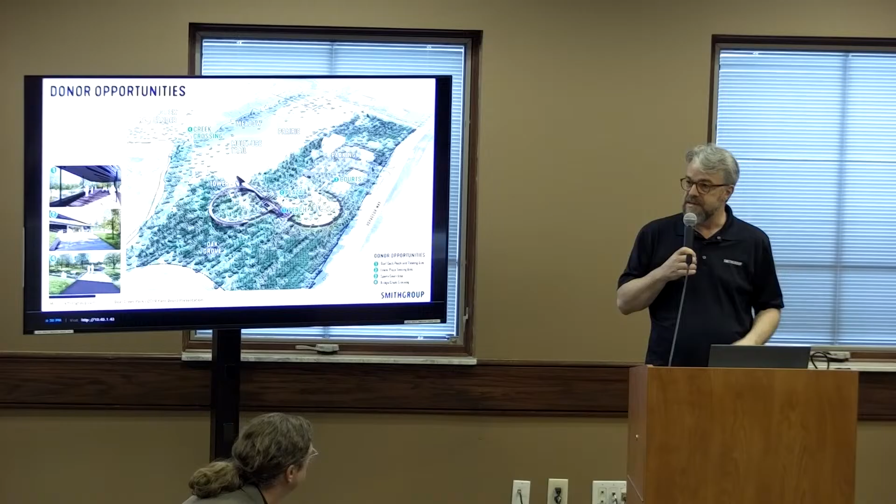Mark asked: Greg, on the south end, even though that's future, does that lend itself to a structure that could be used like a nature center or training area to bring people into the nature of the park more? We were just talking about that on our walk this afternoon. I think there could be a pretty low impact approach, whether it's temporary - even a tent or something - or a temporary shelter. Especially if we go modular on some of the shelters, I think you could do something over there potentially, if there's a programmatic need - think of it as a trailhead.

I think there could be some places - right now the garage, the barn is playing that role a little bit, but even kind of where the old house was. We're going to do development over there, right? That's where Chutes and Ladders is going to be. There's going to be a shelter, there's going to be toilets. So do you get a running start and do what we're going to do as a final thing maybe, or is there something more tactical? I think absolutely that could be possible if the programmatic needs out there make sense.

And how about wildlife in this general area? Mostly it's birds, deer, yeah. I don't think we're going to find anything rare - we have not had any requests come back indicating evidence of that. You could always have something unique pass through, but the predominant species you're going to see are there not because of the site, but because everything around the site is so suburban. It's going to be predominantly suburban wildlife. The thing you might get - I'll say this, but don't hold my feet to the fire - it's going to happen.

Because you've got the Bear Creek corridor connecting up to the Eagle River corridor, it wouldn't be a surprise if someday a bobcat came through. That's the kind of corridor a bobcat would run on. But that's probably about the most interesting wildlife you'd ever see, other than aviary wildlife. You could see some great horned owls, eagles, or some really interesting hawks, but probably not. You're never gonna see it.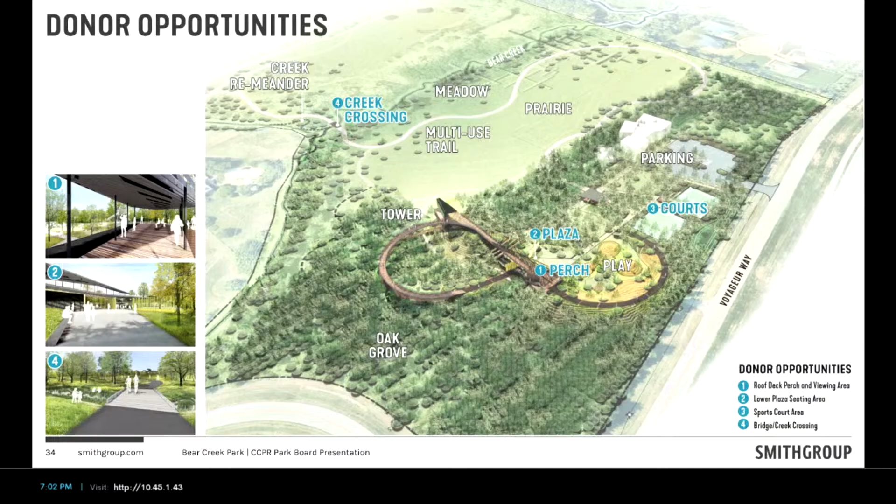One of the things I like about this particular plan too - we had quite an extensive conversation regarding the tower. I mean, obviously the oval design, I kind of joke it's almost a Pacific Northwest design, but it's a Carmel Northwest because we're in Northwest Carmel. For the tower itself, we did some modeling looking at more literal towers, because that's kind of what was illustrated in the master plan. Of course the master plan is conceptual, but the idea of having height - we looked at different heights and what view sheds you get.

One of the things we quickly determined is the view we're trying to provide is of the park, of the nature, the prairie, the valley, looking towards the creek. Our goal is not to see the towers downtown. So by doing that you start shrinking the tower. We want it to be one of the icons of the park, but maybe not the literal tall icon that was hinted at in the master plan - I think even more powerful than that fire tower type idea that was the imagery of Brown County State Park. So I'm super excited about that, and the idea that you can go up and down and have experiences above and below it. I think it's really powerful, and it's going to be something unlike any of our parks, but also unlike any park you see within the metropolitan area, or beyond quite frankly. So I'm super excited about this one.